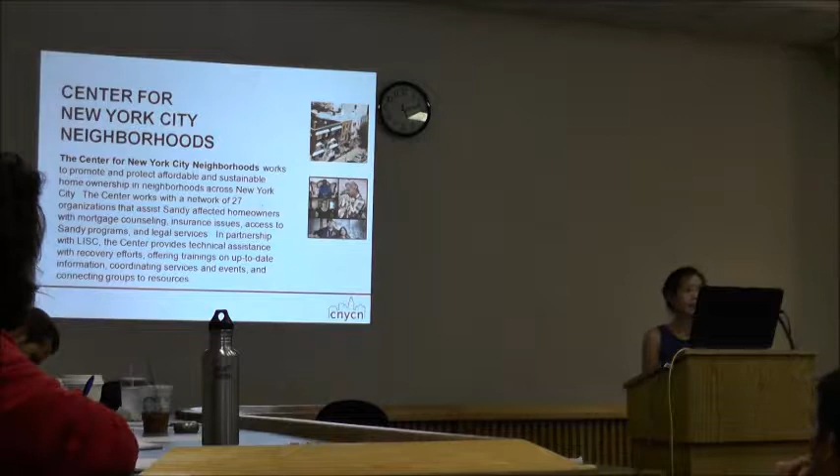They're an organization that developed in response to the foreclosure crisis in New York City. And since Sandy, have provided mortgage, insurance, and legal services. They've also developed a really robust flood insurance website that we'll share with you later this evening.

We also have the Pratt Center for Community Development. They're an organization that works to create a more equitable New York City for New Yorkers in partnership with CBOs, small businesses, and through policy.

Also on board, we have community-based organizations working in the Sandy-impacted communities. We see this as being a vital component to the help desk. So with the CBOs, they're helping us identify potential spaces in their neighborhoods that would be a good place to host the help desk. They're also helping with outreach and supporting client follow-up after the help desk event takes place.

So there have been 2 help desks thus far. We're considering them to be the pilots. One was held in the Rockaways in October. The other was in Red Hook in February. And those went really well, so we're signing up for another round of help desks and hope to hold between 6 and 8 help desks between the middle of August and the end of October.

Our first one is going to be in the Rockaways. We'll be in Arverne, and through the generosity of the Battalion Pentecostal Assembly Church, and the host is Ocean Bay Community Development, and they'll be working alongside AFI, NYLAG, and Queens Legal Services to hold the first help desk next week on August 13th.

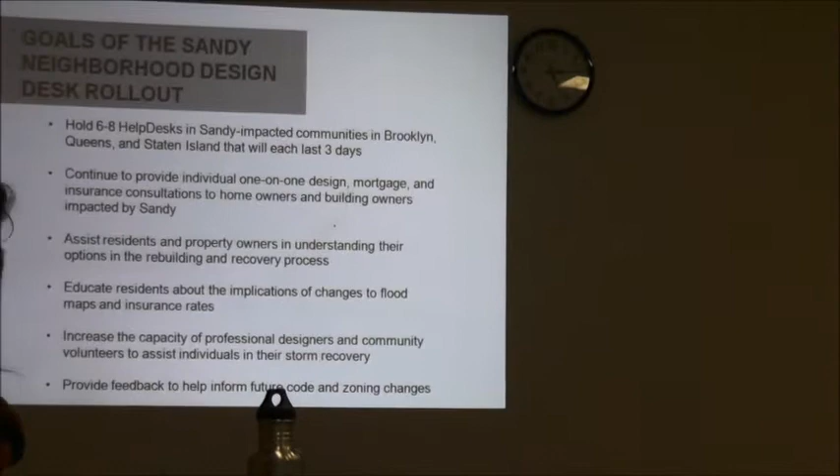So some goals of the help desk. We want to continue to provide one-on-one design consultations to property and homeowners, as well as mortgage and insurance consultations. We're very aware that the situation in New York City is different from neighbor to neighbor, and we want to address that.

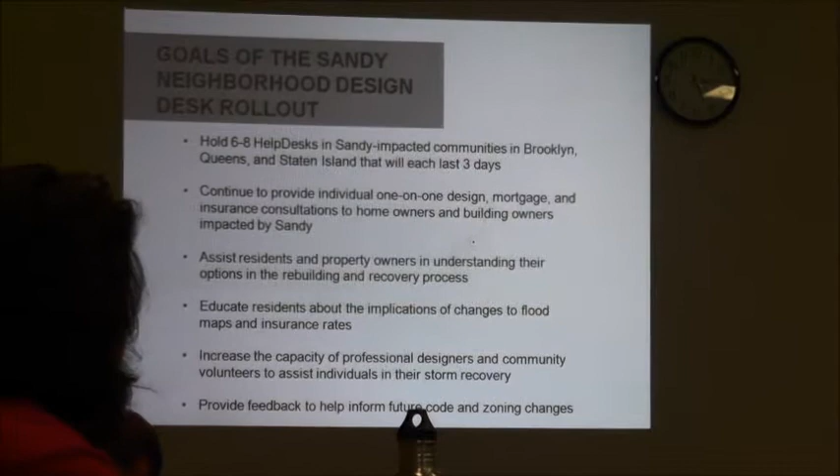Secondly, we want to assist residents and property owners in understanding their options for rebuilding and resiliency, and give them information to become advocates for themselves. We also want to increase the capacity of designers and the community volunteers.

And last but not least, we want to help provide a feedback loop to inform future code and zoning changes.

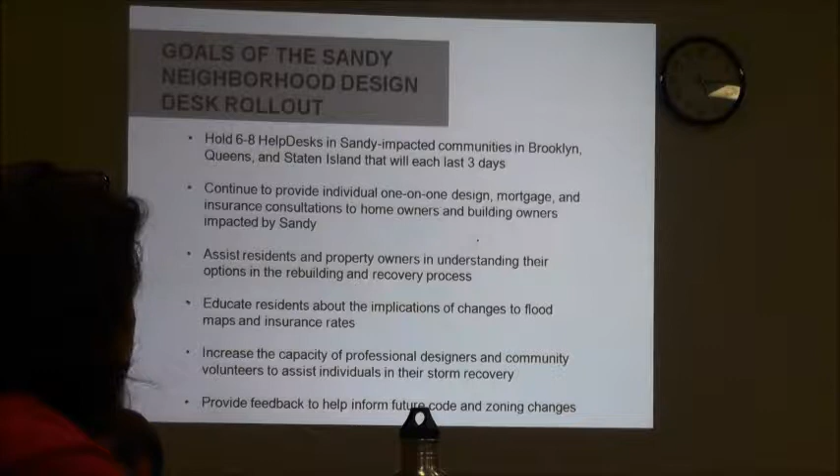So as a volunteer, we have a few requirements. The first is, this is a professional environment. Be on time. Be aware that getting to many of these locations will take a little bit longer than you think, so just check where you're going beforehand.

Also be aware that the people coming to the help desk have had a really intense 2 years. So any frustration or anger you encounter, don't take it personally. Just remember to be patient, act with grace.

The goal of this evening is to gain resources for you to use at the help desk. We realize we'll be providing a lot of information in the course of 4 hours, so try to absorb as much as you can, but be aware that you'll have a support system in place that will help you. And if you don't know an answer to anything, it's okay to say, I don't know, and ask for help. There'll be staff there to assist you.

I'll be emailing out later this week a list of resources for you to go through, try to read as much as you have time for. I will also be providing a volunteer agreement form, as well as give you an idea of what the client agreement form will look like.

We realize that there's only so much information someone can receive within a 30-minute time slot at the help desk, and this agreement basically says, we're providing you services in a limited amount of time with a limited amount of resources, but please do your due diligence and seek professional help after you leave the help desk.

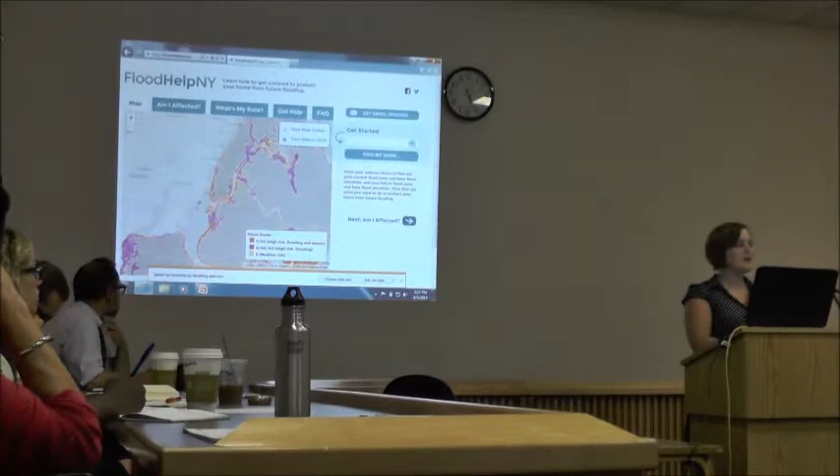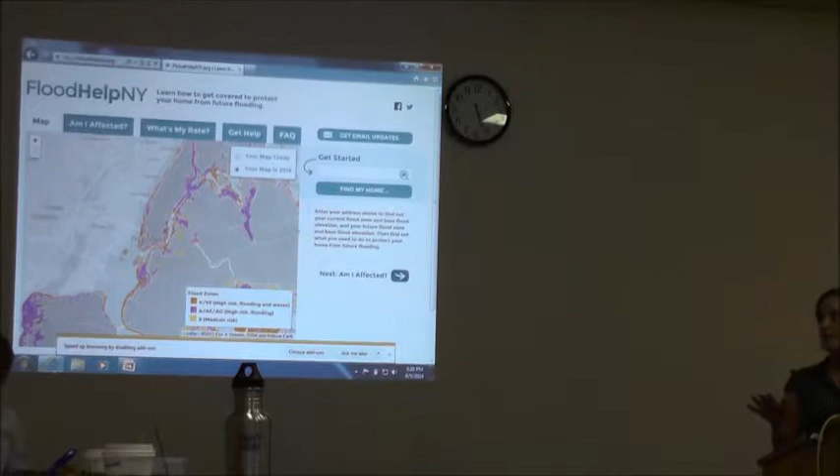How many of you have familiarity with flood insurance? Like how many of you have flood insurance, or know what your flood insurance zone is? Good, all right, so there's some familiarity.

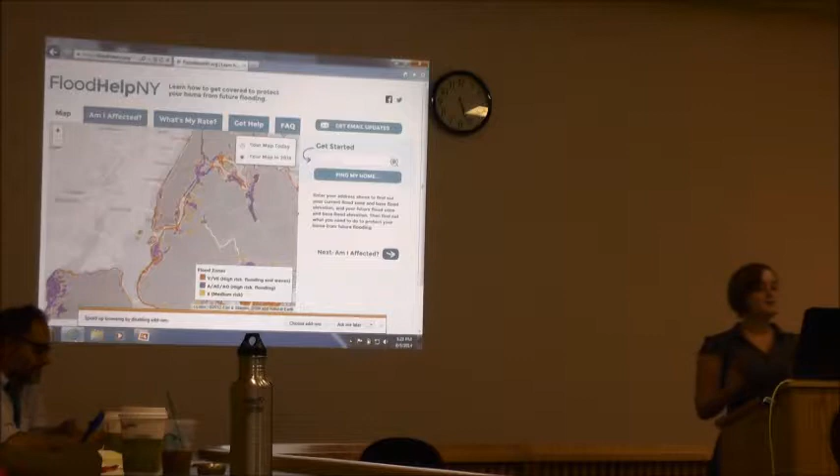Basically, what I wanted to do is provide a really quick overview of what the major issues in flood insurance are going to be with regards to the people that you're working with, and also to demo our website, which is, as you can see here, Flood Help NY. This is still in beta, but you will have access to it at the actual help desks.

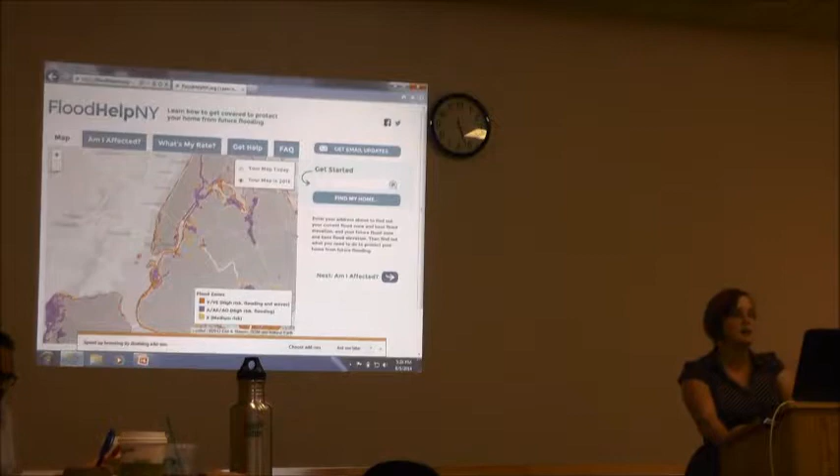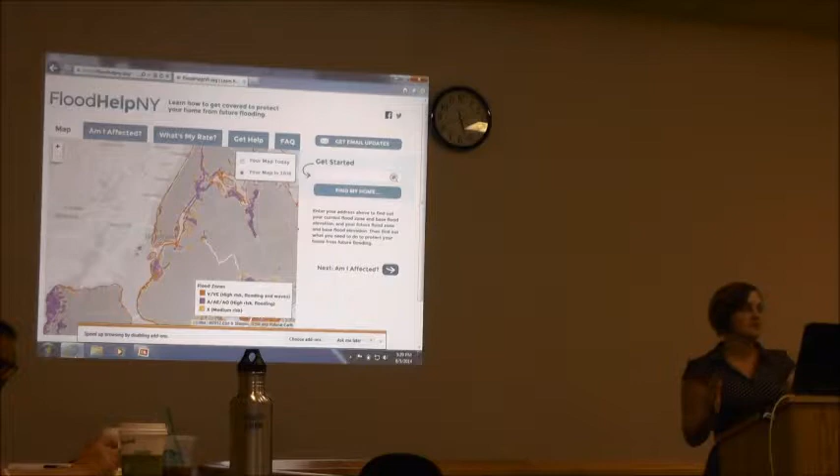So, flood insurance. There's a couple of things going on with flood insurance right now in New York City, and one of the really big ones is that we're actually in the process of updating our flood insurance rate maps. Basically, flood insurance in New York is provided through the National Flood Insurance Program, which is a government-run program. The reason government regulates and runs flood insurance, unlike most other forms of insurance, is that with floods you had a lack of a market in providing flood insurance because it's such a mass catastrophe—a lot of hurricanes wiped insurers out. So we created the National Flood Insurance Program in the 60s.

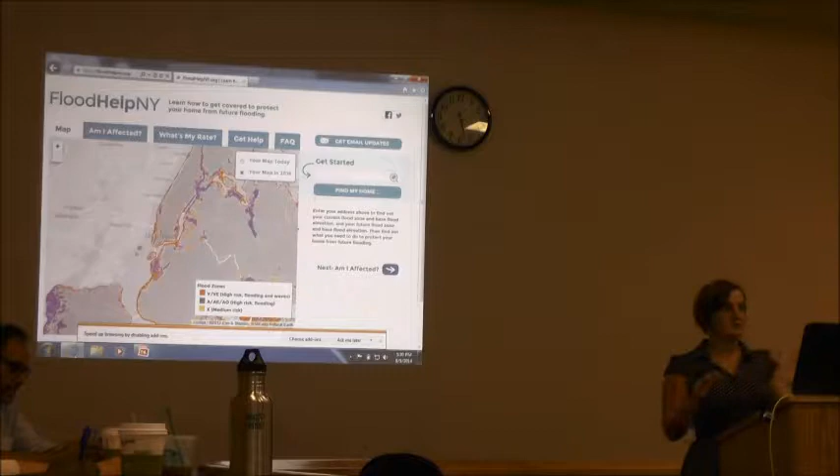Basically, what that means is that a city or locality can opt into the flood insurance program, and when they do that, they create a flood insurance rate map, and they also agree to create much stricter standards for building in their flood-prone areas. In addition, everything that was built prior to that date gets grandfathered in so that they get subsidized flood insurance rates.

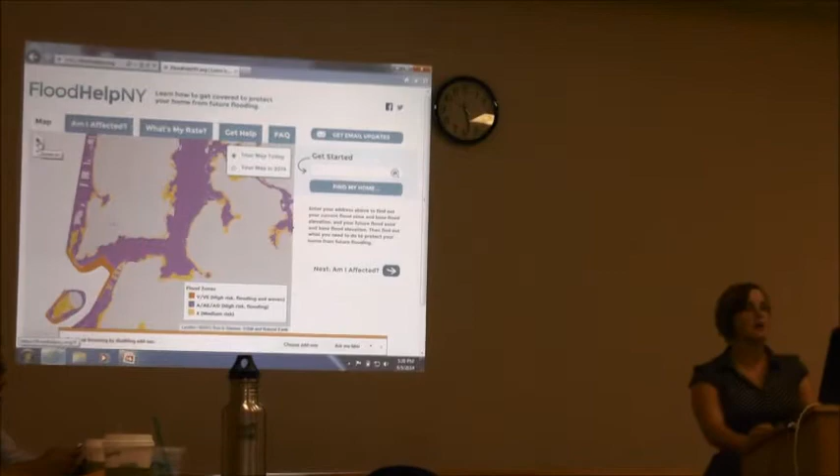So New York City joined the National Flood Insurance Program in the 80s, and we have a flood insurance rate map, which I'll show you, that was created then. Actually, before Sandy struck, New York was in the process of updating its flood insurance rate maps. What we did in the 1980s was obviously limited by the mapping technology of the time, which has improved quite a lot since. So the new maps really reflect the actual degree of risk from flooding today much better than the ones currently in place.

So let me show you. This is New York. Since we're going to the Rockaways first, I will show you the Rockaways. Okay, so this is a piece of it, and as you can see, there are three zones: V, which is orange, A, which is purple, and X, which is yellow. I just want to show basically how the new maps will change the type of zones people have in New York, in the Rockaways.

So basically what you need to know is that V and A are the high-risk flood zones. This is the area where you have a 1% chance of being flooded in a given year—basically also called the 100-year floodplain. If you live in this zone, you're at very high risk of flood damage, and you're also generally required to get flood insurance. But I'm going to show you what the new maps are doing to the Rockaways, because it's pretty dramatic.

Right? So you can see that a lot more people are going to be added to the high-risk flood zones when the new maps are implemented. They're right now projected to go into effect in 2016. So this is currently the map that's ruling.

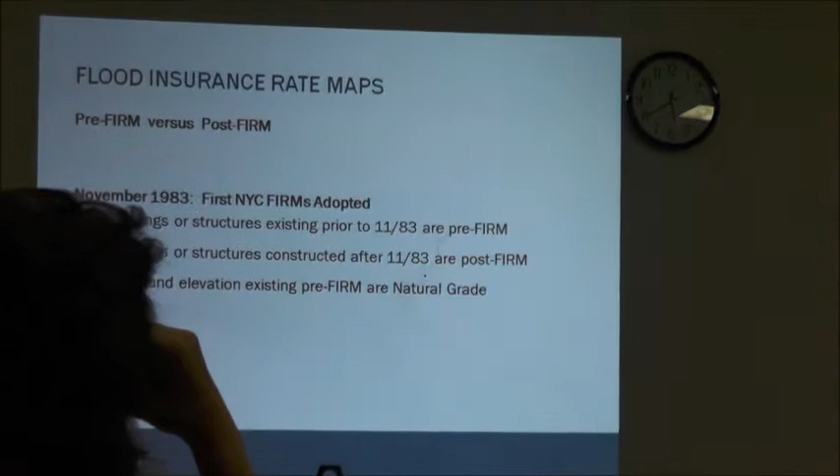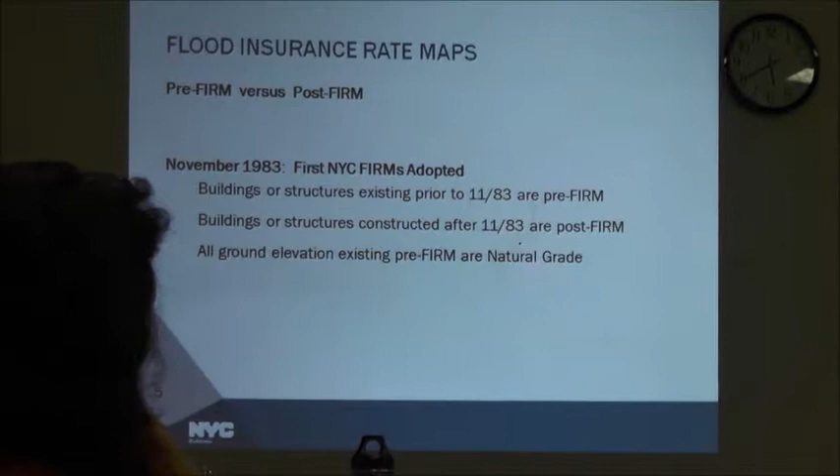So there are pre-firm buildings and post-firm buildings. New York City adopted our flood insurance rate maps and our local ordinance in 1983. Any buildings built before 1983 are considered pre-firm, and any buildings built after 1983 are post-firm. Any ground elevations before 1983 are considered natural grade.

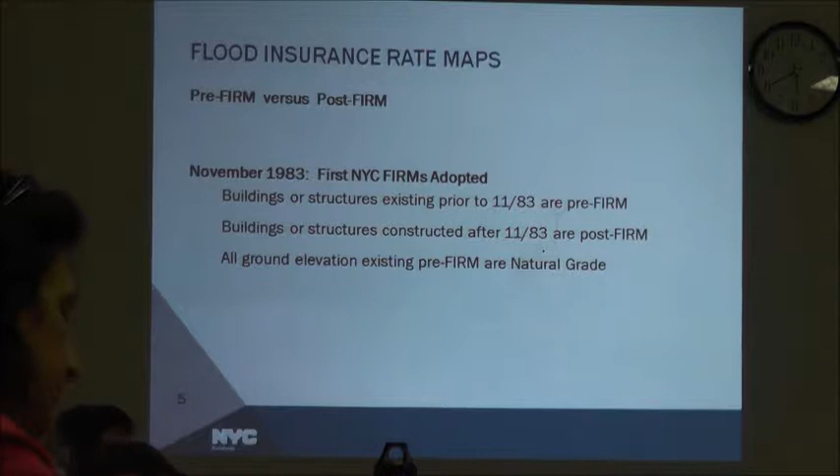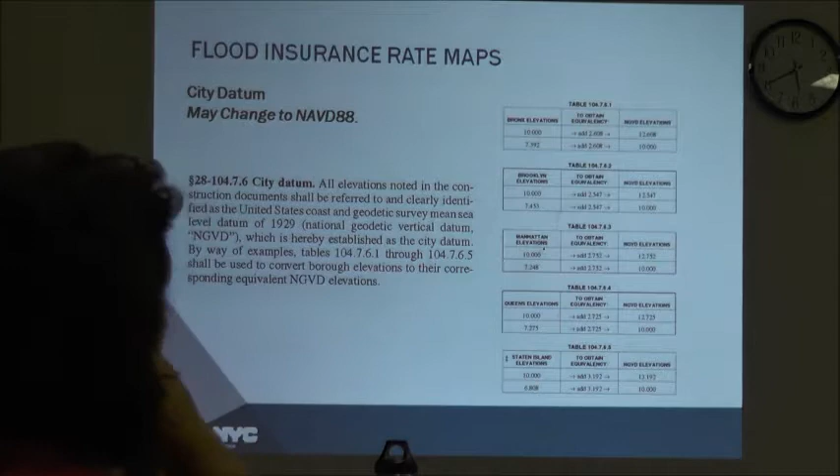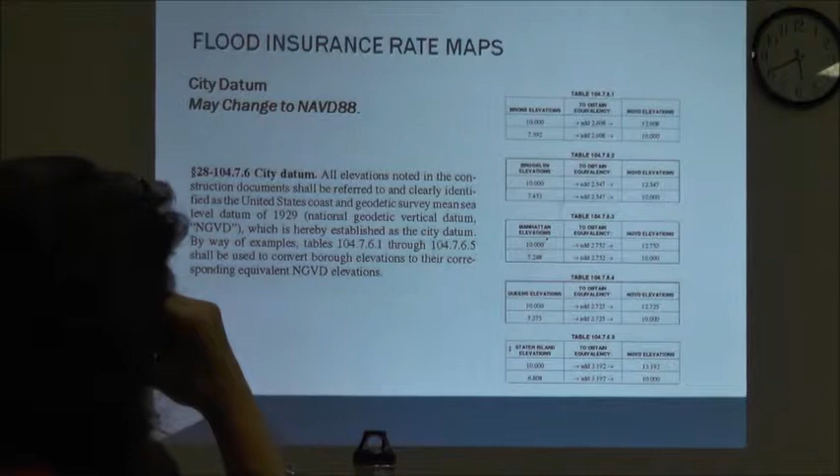There was also a datum change with Local Law 96. Previously the city datum was NGVD 1929, and now the city datum is NAVD of 1988. The preliminary flood insurance rate maps list all their base flood elevations in the datum NAVD of 88. The homeowner may present you with an old survey showing a datum of NGVD 1929 or Queens Borough datum or who knows what. So it's important to make sure that when you're comparing the two elevations, you're comparing the same datum.

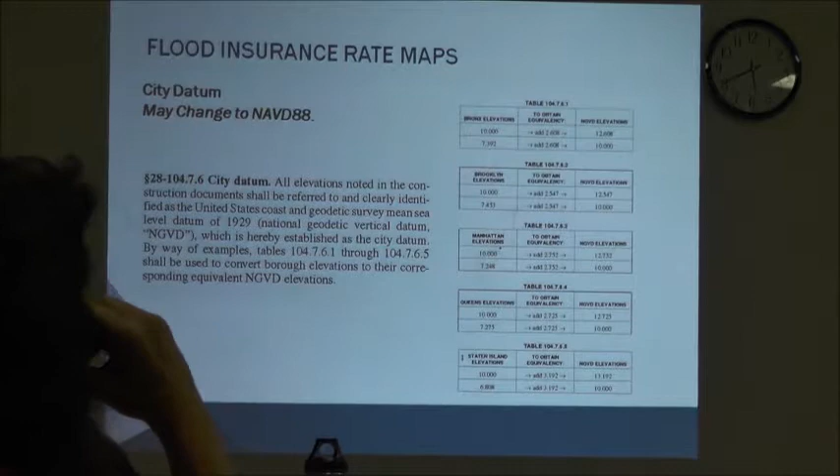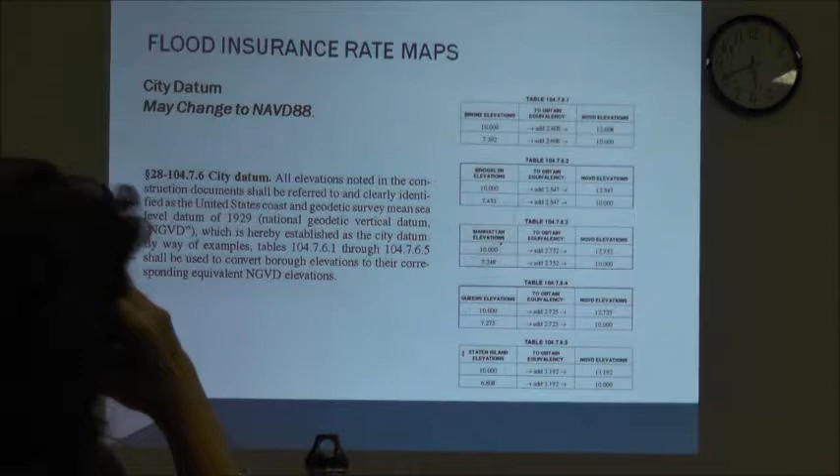There is a means to convert between the different datums, and that can be found either in our building code or there's another nice website, region2coastal.com. That's another lookup tool where you can put in addresses and get the different special flood hazard areas, and you can get information about converting between different datums. So once again, that's region2coastal.com, a FEMA supported website.

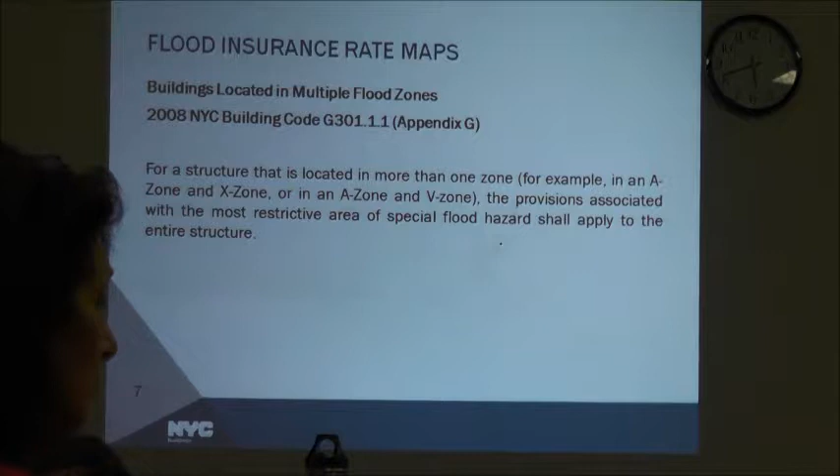Where a building is located in multiple flood zones, so if you're looking at the flood map and you see that just a little corner is located in the AE zone, but the rest is located in an X zone, the more stringent flood hazard area applies to the entire building. Even if just a little corner is touched by the flood zone, you have to treat it like the entire building is located in the flood zone.

For residential construction, which is mainly what you'll be dealing with, all new buildings and substantial improvements have to comply with Appendix G, which is where all the flood-related requirements are located in the 2008 New York City Building Code. So if you have a 1968 code building that's substantially improved, it's going to have to comply with the 2008 New York City Building Code Appendix G like a new building. Or if you have new construction, it's going to have to comply like a new building for Appendix G.

The main requirement for residential buildings is that the lowest floor, including the basement, has to be elevated above the design flood elevation. We talked about base flood elevation, right? That's the level shown on the flood insurance rate maps, the 1% flood. But the design flood elevation is a little different - it makes you incorporate some freeboard, and I'm going to cover that in a second. Just note that there's a difference between base flood elevation and design flood elevation.

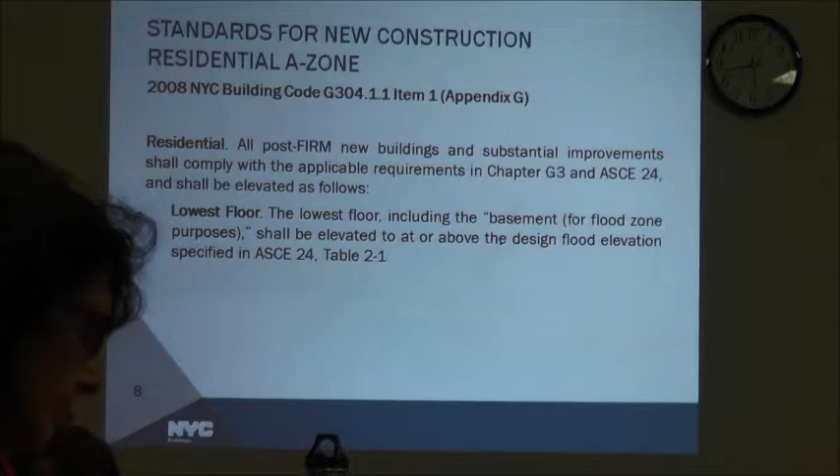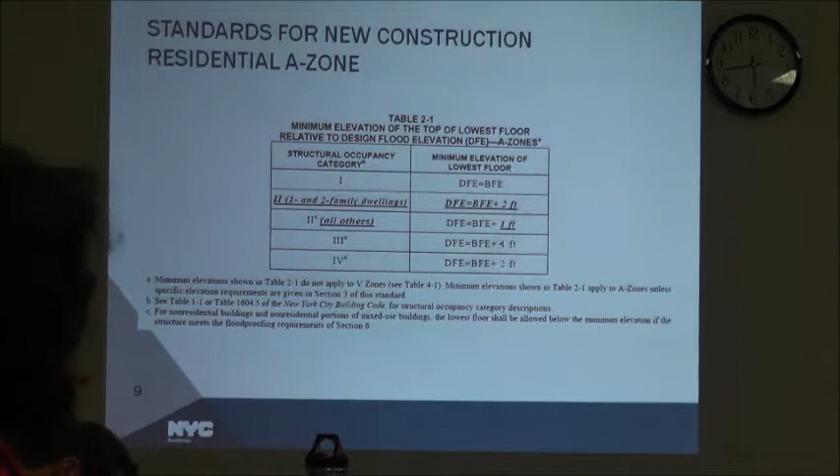So here is Table 2-1. This was recently amended by another local law to add 2 feet of freeboard for 1 and 2 family homes. The way Appendix G works is you determine the structural occupancy category of the building - it's either category 1, 2, 3, or 4. The higher the structural occupancy category, the more restrictive the requirements are, the more freeboard that's required. For a structural occupancy category 1 building, we're talking about an agricultural building or a grain silo or something like that, the design flood elevation is equal to the base flood elevation because the risk of that thing being flooded is, oh, who cares?

Not really, but. For structural occupancy category 2 buildings, you're talking about a 1 and 2 family dwelling. This was recently amended to add 2 feet of freeboard, so the design flood elevation is equal to the base flood elevation shown on those maps, whatever that number is, plus 2 feet of freeboard. And that's the elevation of your lowest floor. For all other buildings, not a 1 and 2 family building, maybe a 3 family, 4 family, whatever - that's going to be structural occupancy category 2, all others, and that's going to require 1 foot of freeboard. I think that should cover the majority of buildings you're going to deal with.

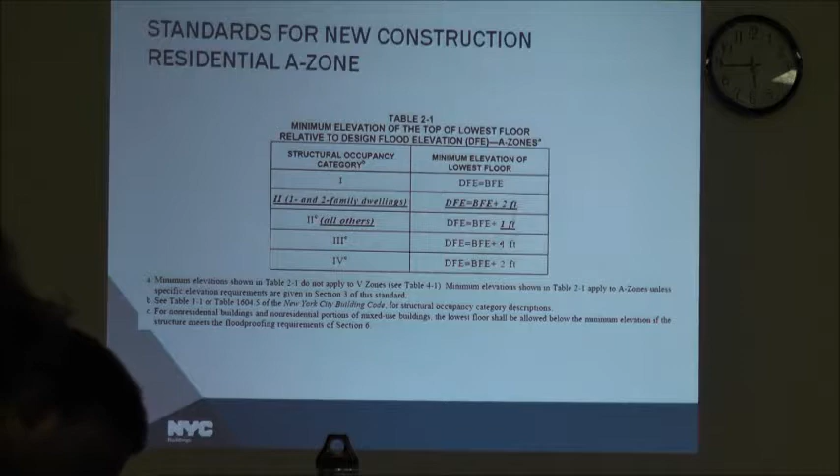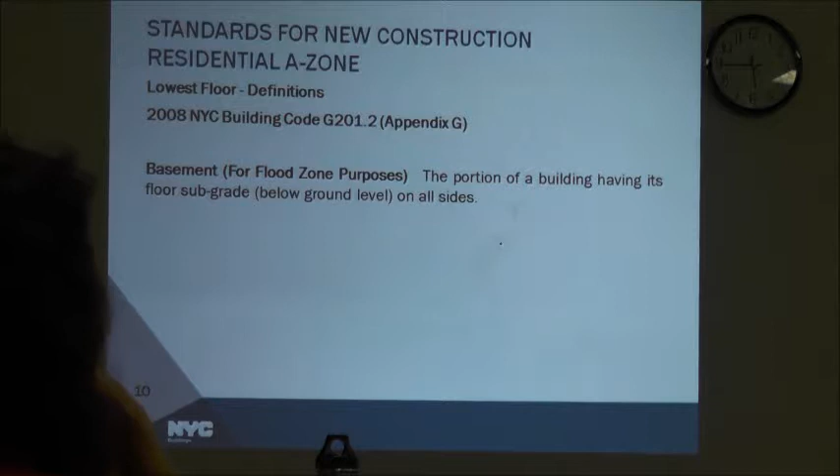It's important to realize that basement for flood zone purposes is different than basement in zoning and basement in building code. For flood zone purposes, the portion of the building having its floors subgrade, below grade on all 4 sides, is considered a basement. Basements are a no-no in the flood zone, because when the flood comes, the basement fills with water, and then somebody has to come and pump it out.

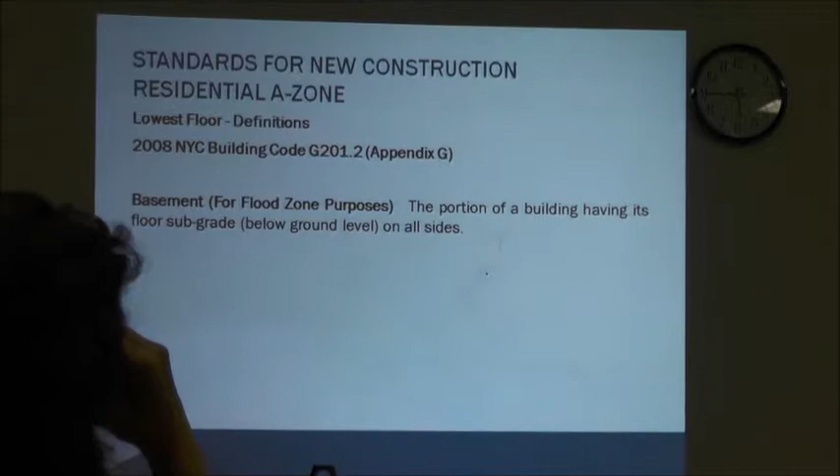That's a wet flood-proofed enclosure for residential buildings. A wet flood-proofed enclosure is mainly an area that is constructed of flood-resistant materials, and it has vents that allow water to come in and come out, and then someone would go underneath there and hose it down and they're good to go.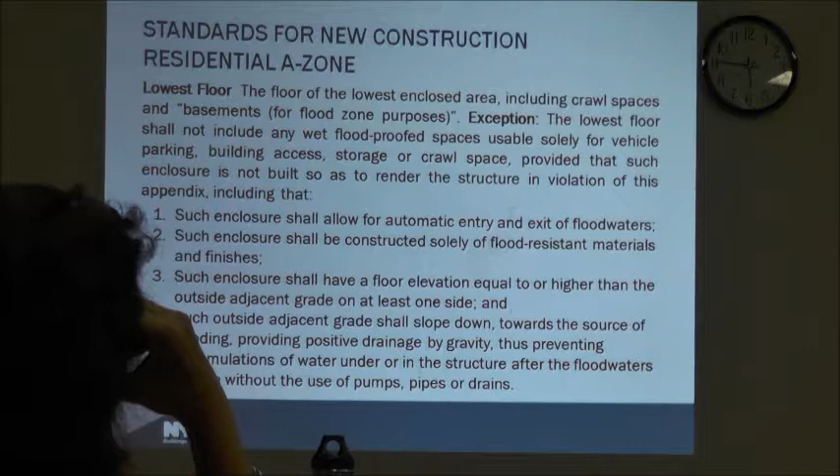They don't have to replace the building materials because they're all flood-resistant materials, typically concrete, tile, not sheetrock, not typically anything that would support the growth of mold.

That's bullet 3: the floor of such enclosure has to be at or above the lowest adjacent grade. LAG is a really important term, you're going to see it on the elevation certificate you're looking at. Lowest adjacent grade is the grade outside the building, so it's the lowest grade outside the building. The interior space that's enclosed can't be below that lowest adjacent grade.

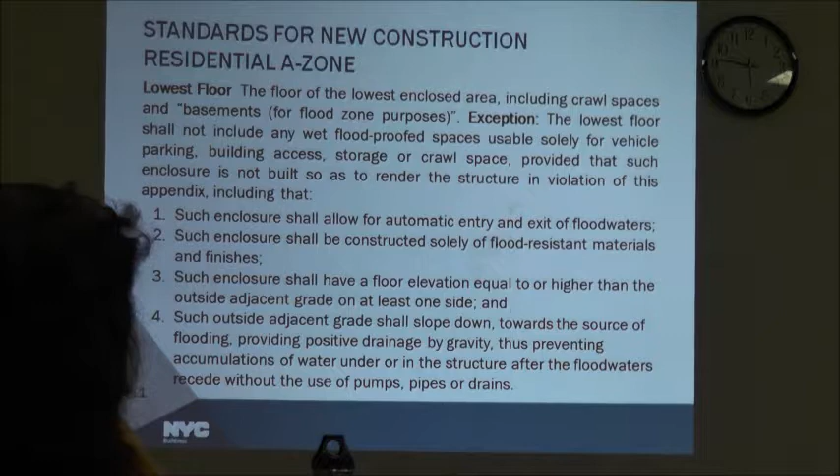Okay, so let's skip this one and quickly look at these different diagrams. Do we have a pointer?

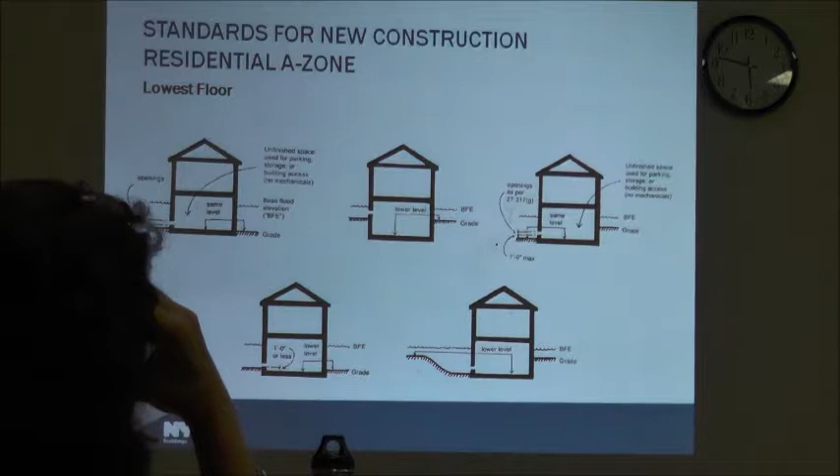No? Okay, so these are basically showing you what are acceptable construction types for substantially improved and new construction, and what are not. I think what it's trying to illustrate is that the lowest floor of the building, all the way to the left, for flood zone purposes, because this is wet floodproofed, you have the vents, the grade is the same on the interior and exterior, is going to be rated all the way up top. It's not going to be the space below because this is an enclosure, which is an exception to the definition of lowest floor. Basically all of the other scenarios are no good because the enclosure is below the lowest adjacent grade in pretty much all of these scenarios. So the takeaway is that you have to have the lowest adjacent grade and the interior of the enclosed space pretty much at the same level.

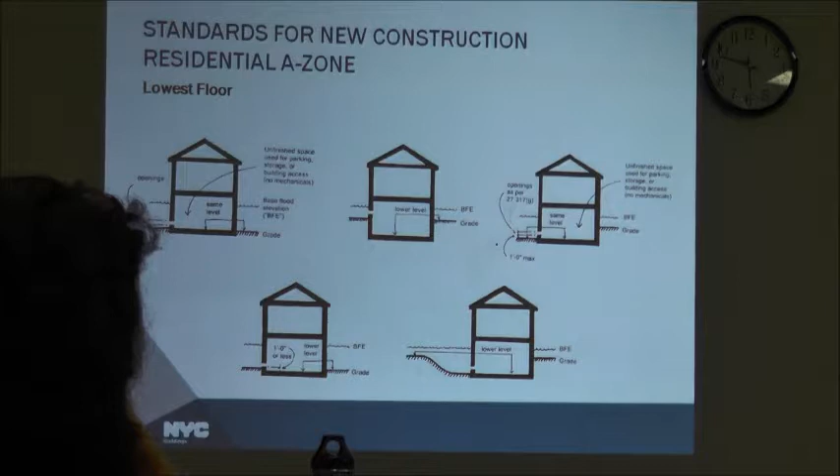As far as enclosures are concerned, this is where people are going to be elevating their buildings, because they want to get the insurance benefits of elevating their building, and they also want to make the building more resilient. So they're going to be elevating the lowest floor, and they're going to want to use that space below for something - it's this enclosure that's wet floodproofed that I've been talking about. The uses for enclosures below the lowest floor are parking for vehicles, storage, and building access, and that's it - those are the only uses. It must be clear to them that they're losing this space when they elevate the building. It can be used for parking, storage, and building access only - it can't be used for living space.

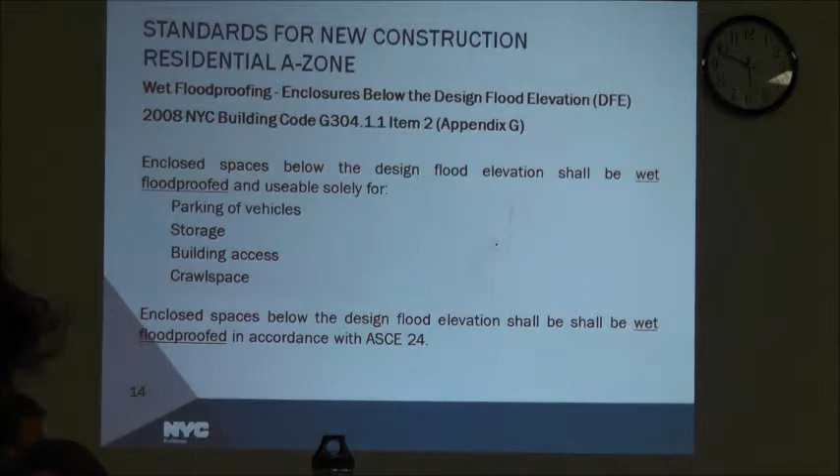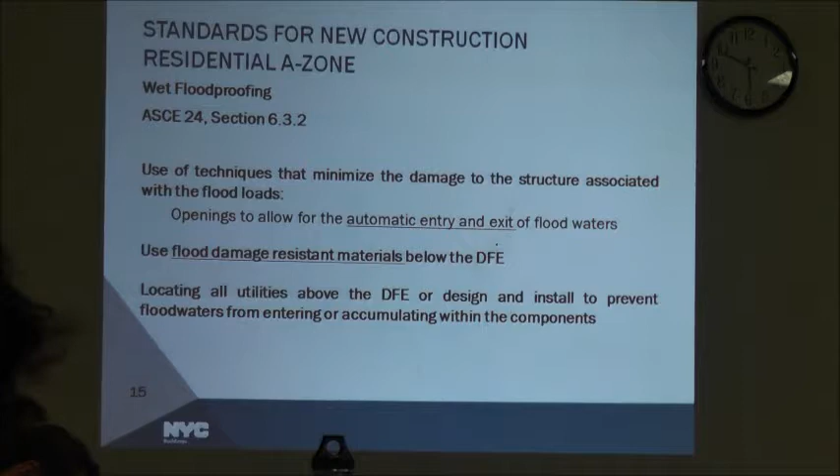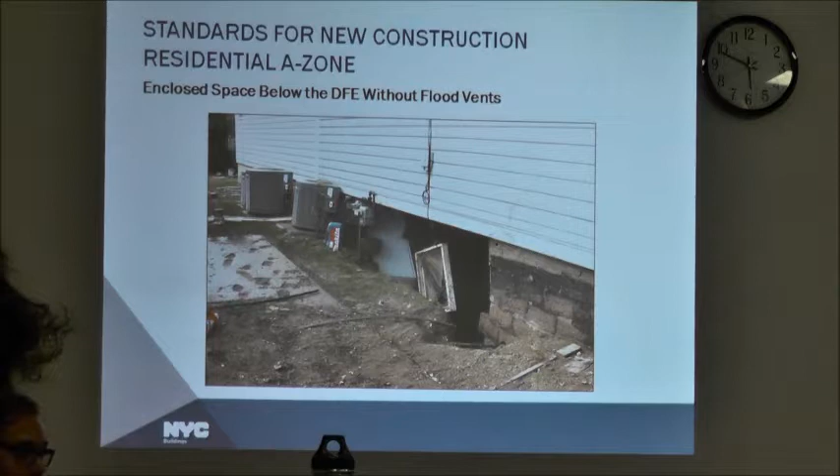This is talking about the enclosure and wet floodproofing - the vents are going to allow the water to come in automatically. When the floodwaters rise, the flood vents let the water right in, and then let it right back out. What that does is it prohibits water pressures from building up, unequal hydrostatic forces. In this instance, you had a basement wall that failed because this wasn't properly wet floodproofed.

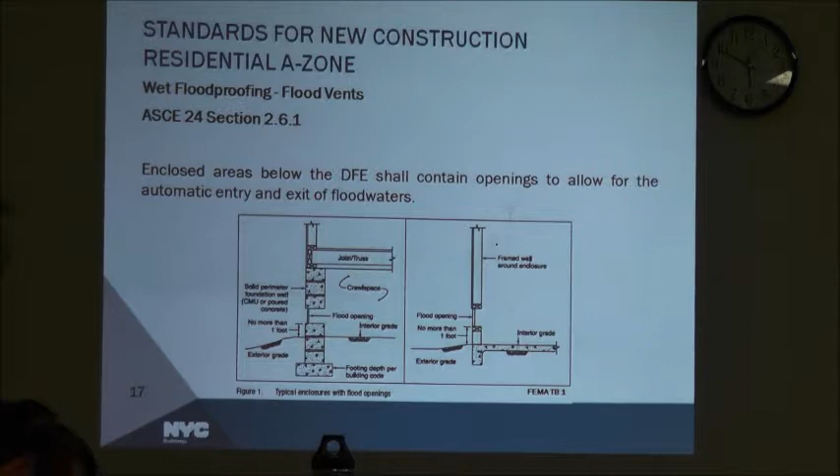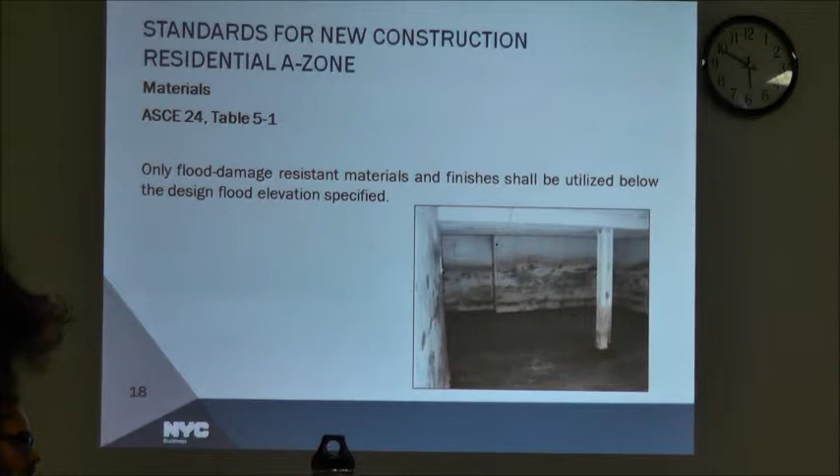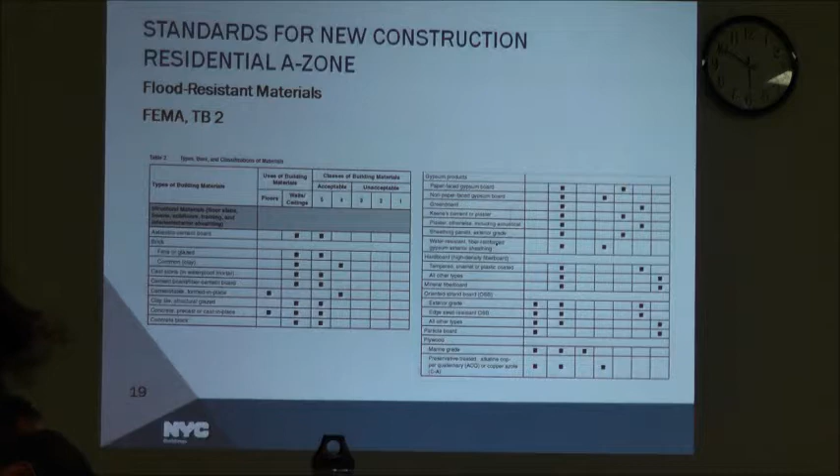FEMA has a technical bulletin 2, which covers all the different types of materials that are permissible for use within wet floodproofed enclosures below the design flood elevation. As you can see, there's different classes of building materials - class 5 is acceptable, class 1 is not acceptable, 5 and 4 are acceptable, and 3 through 1 are not acceptable. For instance, concrete block as a wall or ceiling is considered class 5 material - it's acceptable, it's great.

So for structural design, for new and substantially improved buildings, it's imperative that the footings be designed to prevent flotation, collapse, and lateral movement during the design flood, and that's all.

ASCE 24 is the national reference standard which we adopted in Appendix G, and there's a lot of references to ASCE 24 - this one is in reference to structural considerations. ASCE 24 has been amended extensively in this region in New York City, so you have to look in Appendix G, Section 501, which lists all the different amendments to ASCE 24.

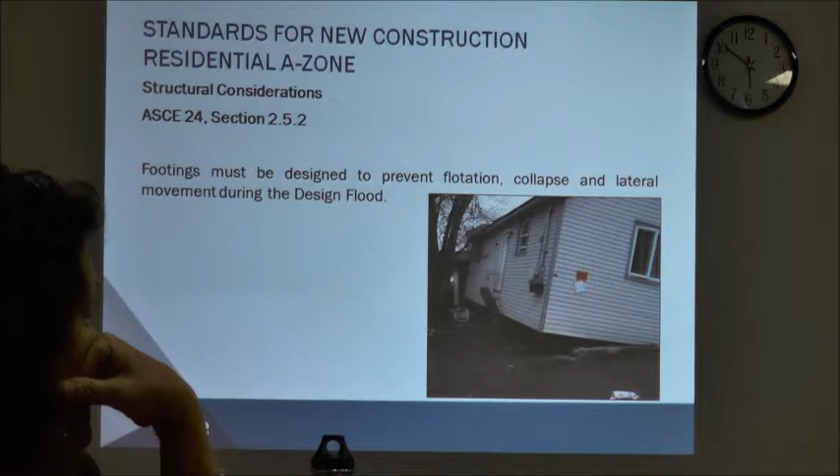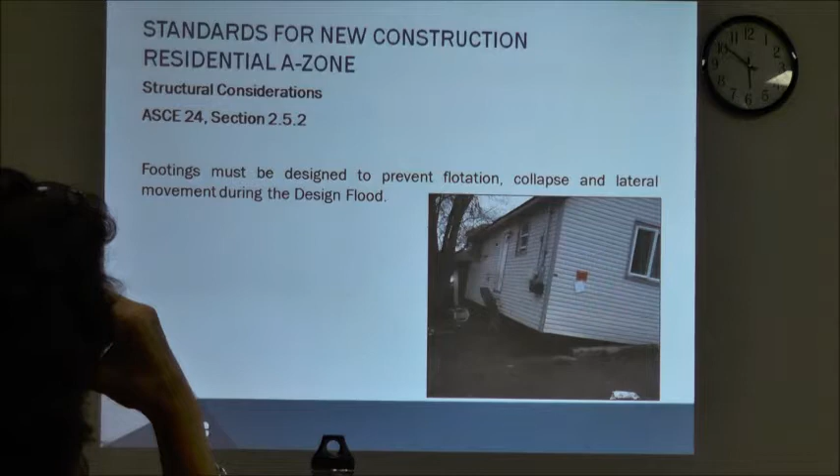If you were to look in ASCE 24 at those tables I was just showing you, table 2-1, it would show you that design flood elevation equals the base flood elevation plus 1 foot of freeboard for a structural occupancy category 2 building. I know this is a lot, but you just have to know that you need to look and make sure you're accounting for the amendments in Appendix G to this reference standard.

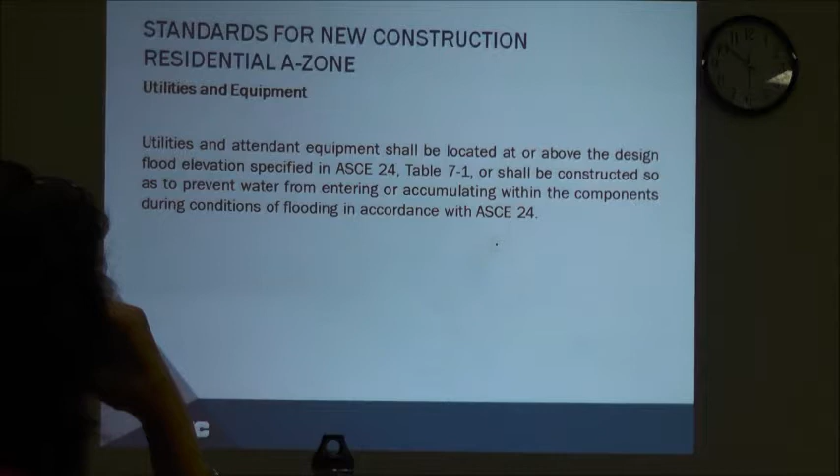For residential buildings in a Zone A, all utilities and attendant equipment have to be located above the design flood elevation, and this is specified in Table 7-1.

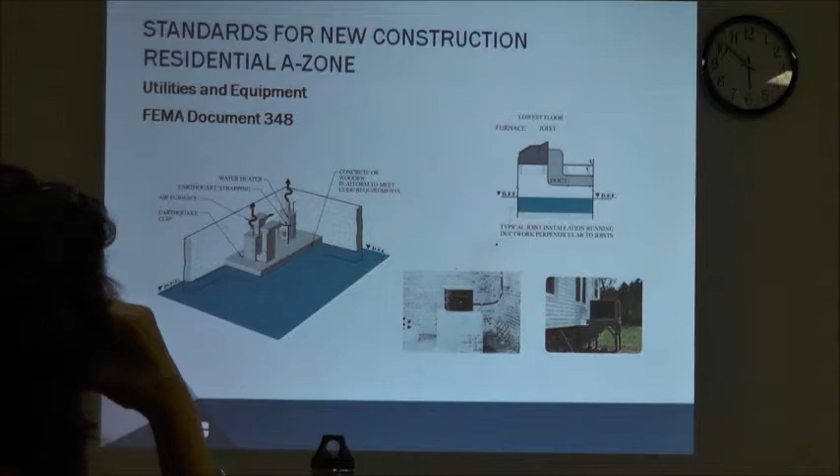Typically, we see people trying to elevate on pedestals or elevating on frames exterior of the building. So mainly what we're trying to do is elevating is the best way to defend utilities against damage and flood.

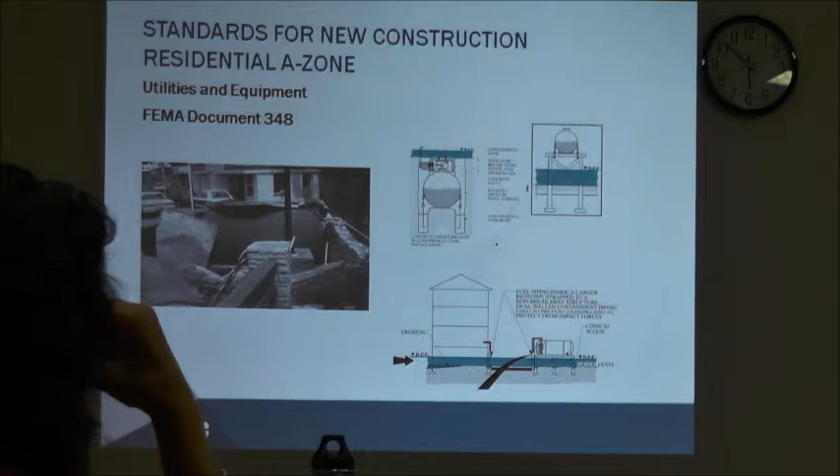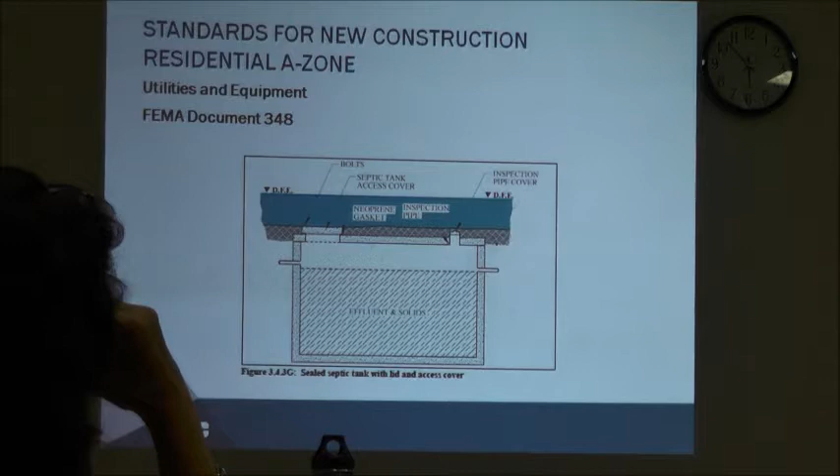And in some instances, you're going to be dealing with septic installations, septic design. The main thing that you don't want to happen during a design flood is for the contents of the septic system to discharge into the floodwaters. So that's why neoprene gaskets are required, backflow preventers are required, to make sure that when you flush, it doesn't go directly into the floodwaters.

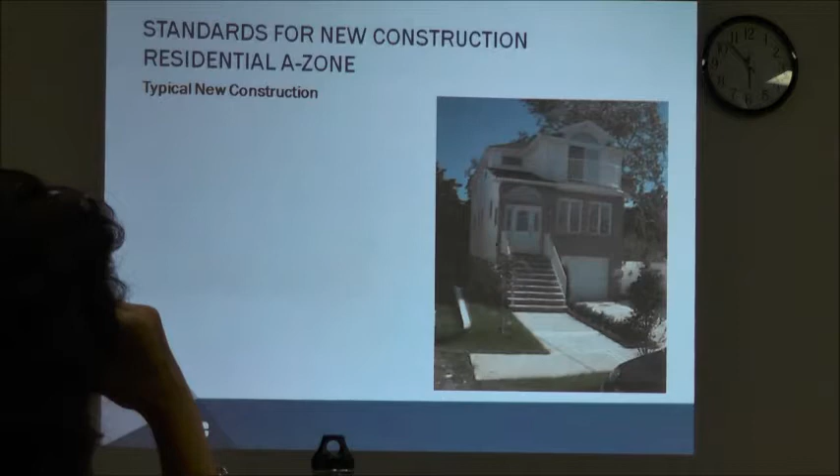This is typical new construction in the A zone. I think this is in Staten Island somewhere. What you see here is that there's parking below the lowest floor, which is acceptable, and the stairs are leading up to this lowest floor, which is elevated. So this is typical A zone construction.

So I don't think you're going to really deal with non-residential buildings. Are we going to deal with non-residential buildings? Maybe a few. Okay, mixed use, mixed use.

So Appendix G has a specific definition for residential and non-residential. When you're dealing with residential buildings, your only option is really to elevate and to use a wet flood-proofed enclosure below the lowest floor. You cannot have a subgrade space. That's it. Residential buildings, you're really limited.

But if you're non-residential, as defined here in Appendix G, you're permitted to use a technique called dry floodproofing, or you can elevate. Elevating is always the best because you're not relying on any human intervention to install floodgates or anything like that. But in some instances, it's not feasible to elevate, you just can't do it. So then dry floodproofing becomes your next option if you're non-residential for flood zone purposes.

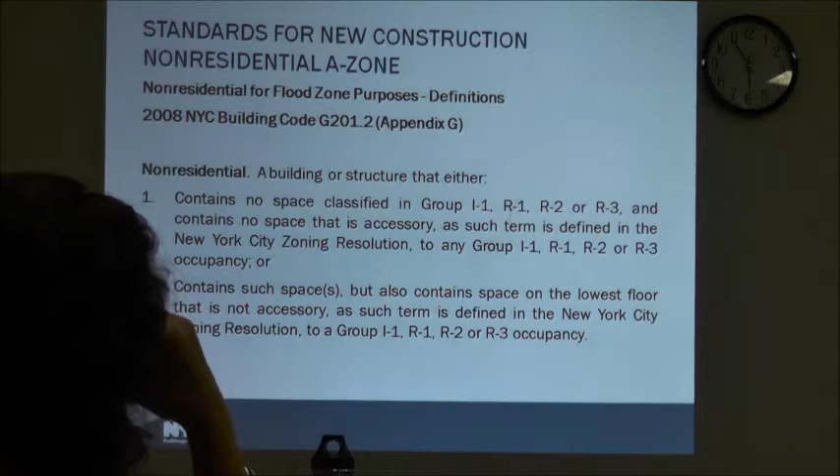So in order to be considered non-residential for flood zone purposes, usually we're seeing item 2 as the trigger, where you contain residential space, but you also contain space on the lowest floor that's not accessory, as such term is defined in the New York City zoning resolution, to group R1, R2, R3. So if you have a bodega or something like that on the first floor, then you could be considered non-residential for flood zone purposes, and now you can have a basement, and you can flood-proof, and you can do certain things that you couldn't do if you were residential.

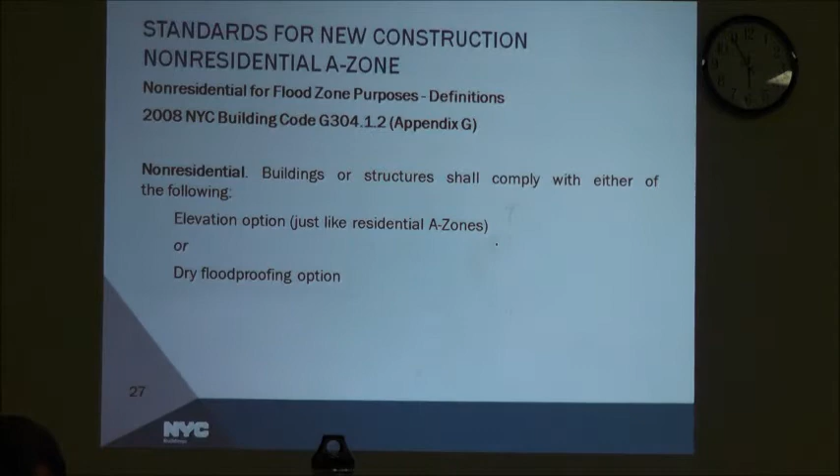So, as I mentioned, you can either elevate or dry flood-proof non-residential buildings. It's expensive, and it takes considerable design to dry flood-proof. You have to account for buoyant forces, for hydrostatic, hydrodynamic forces, and there are significant structural modifications that are usually required, but it's feasible for certain types of buildings.

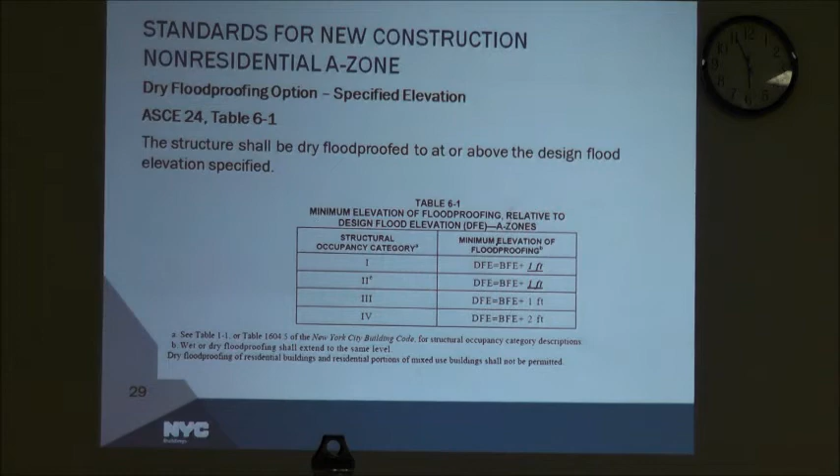immediately adjacent to it. So it's not acceptable to, as of right, just say, oh, well, the egress is in the back of the building, we're going to block this one, and there's an alternate in the back, not to worry. It has to be immediately adjacent, so that someone who's attempting to get out that entrance can look to the right or left, see signage, and be able to get out.

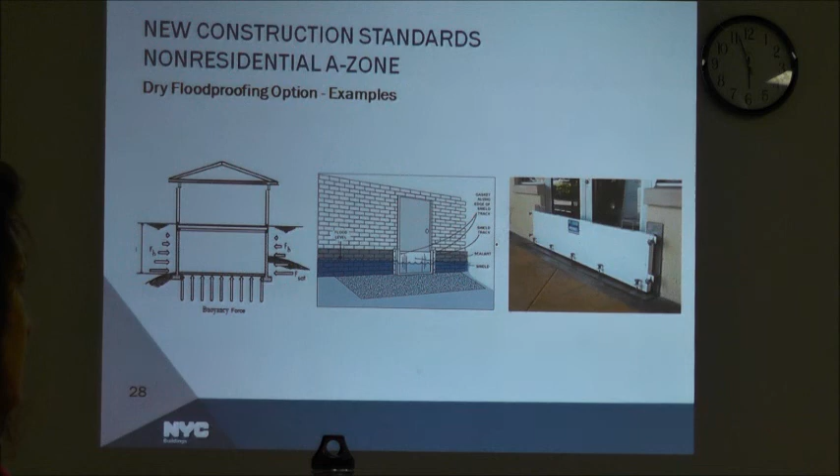As far as utilities and equipment, when they're within